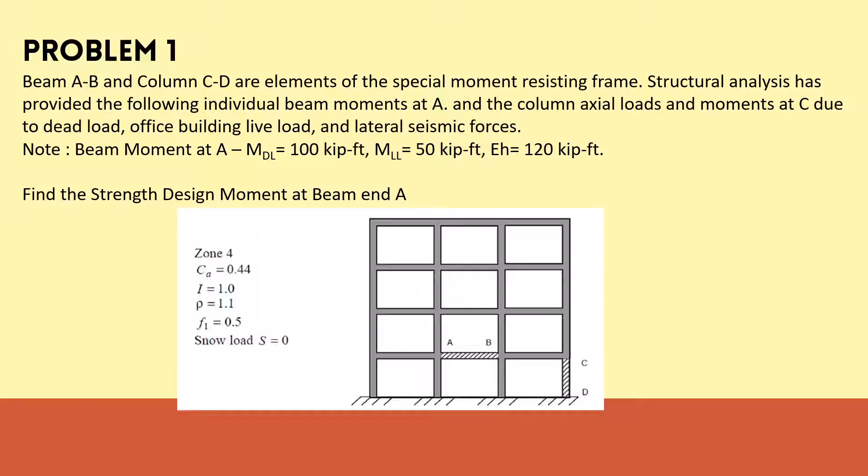For the solution in problem number 1, to identify the strength design moment at the beam end, we have the given formula where E is equivalent to the redundancy factor multiplied by the horizontal force plus the vertical force.

First, we identify the EV since the density and the seismic horizontal force are given. The formula for the vertical earthquake load is 0.5 Ca multiplied by the importance factor multiplied by the dead load. If we substitute the given parameters, we get an answer of 22 kip-feet.

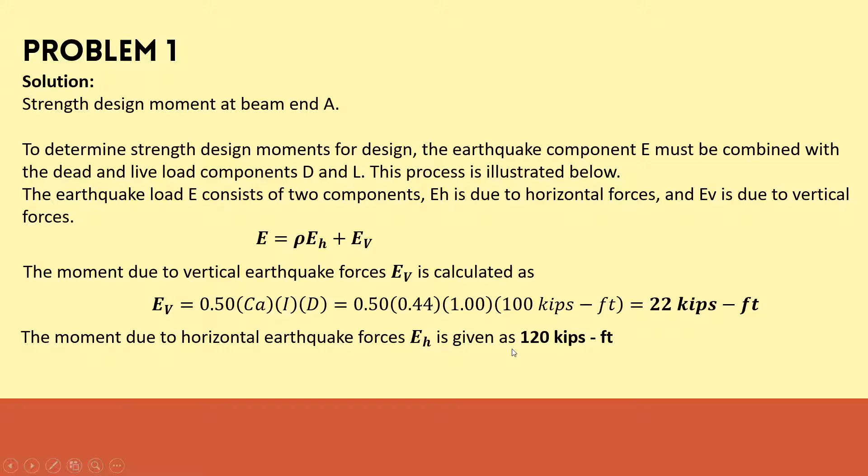As I mentioned earlier, the moment due to horizontal earthquake forces or EH is given as 120 kip-feet. So to substitute into the strength design moment at beam A, E equals density multiplied by the horizontal force plus the vertical force. Substituting, we get an answer of 154 kip-feet.

Since we're discussing moment, the relevant load combinations for earthquake are 1.2 dead load plus 1.0 earthquake load plus 1.0 F1 multiplied by the live load, and 0.9 dead load plus or minus 1.0 earthquake load. Since we're discussing moment, we consider these load combinations in terms of moment.

So for MA or beam moment at A, we have 1.2 moment dead load plus 1.0 moment earthquake load plus 1.0 F1 moment live load. If we substitute these values, we get an answer of 299 kip-feet.

For the second criteria, 0.9 moment dead load plus or minus 1.0 moment due to earthquake load. Since we have plus or minus here, we get two answers which are 244 or 64 kip-feet moments. Since we're looking for the strength design moment, it is safe and conservative enough to consider the lowest value, which is 64 kip-feet. So this is what we'll use for the design, or this becomes our design moment.

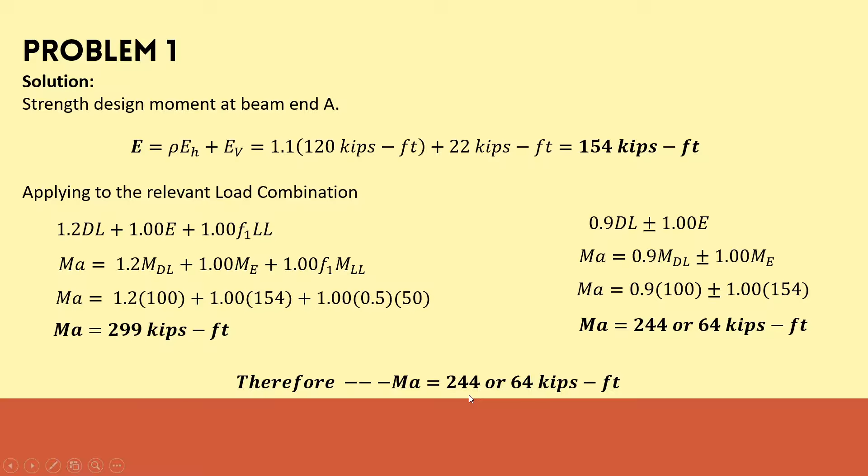Problem number 2: A 5-story concrete special moment resisting frame is shown below. We have the given framing with their theoretical displacement. We have an imaginary line here. This is supposed to be the behavior of our structure when we apply various forces per floor.

The specified lateral forces or Fx have been applied at the corresponding floor level, and the displacement dx at the floor center of mass have been found and are shown below. So for level 5, 4, 3, 2, 1, we have their corresponding heights. For example, this is 3.048, this is also given, and the highest is from level 1 at 3.658 based on the given data.

And their corresponding displacements are also tabulated. This is the displacement, delta S1. For example, at level 5, the displacement is 51.308. So from this point up to this point, the story displacement is said to be 51.308.

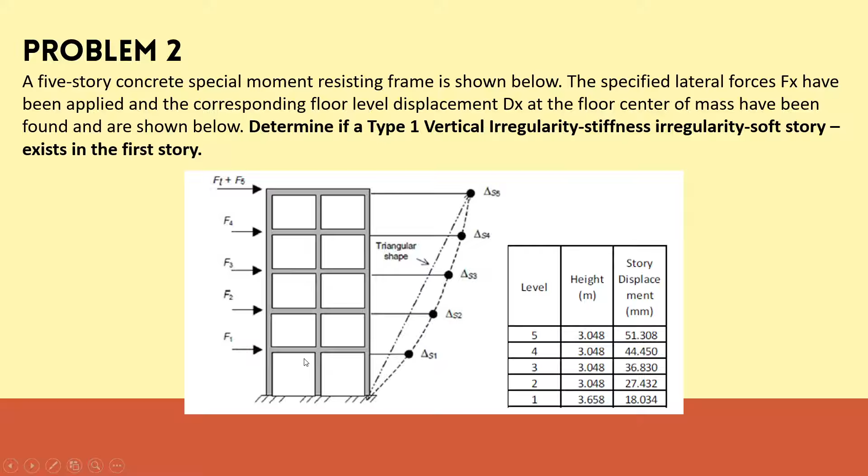According to the NSCP provisions, to determine if there is a Type 1 vertical irregularity, stiffness irregularity, or soft story, we need to perform two tests. First, the story stiffness is less than 70% of that of the story above, meaning our concerned story should be less than 70% of the story above. We'll compute this later. Second, the story stiffness is less than 80% of the average stiffness of the three stories.

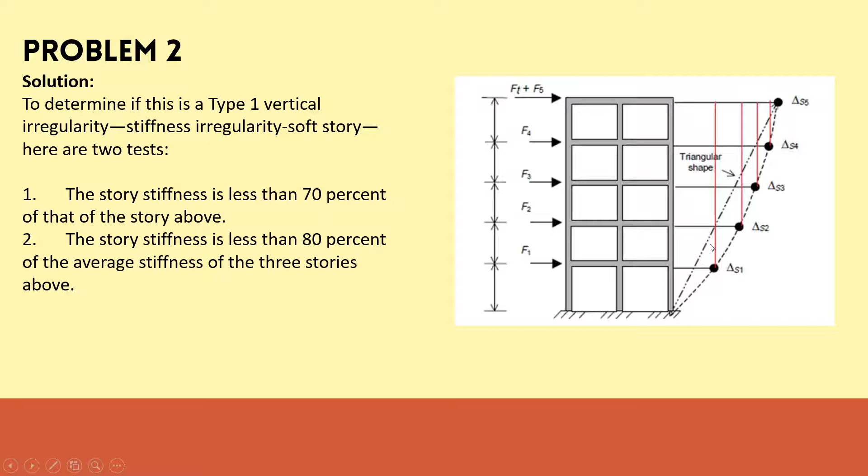Based sa figure natin, kapag maglalagay tayo ng imaginary line or another line dito, triangular yung shape ng ating diagram or yung ating displacement ng structure or story displacement.

So for the solution, in-attach ko dito yung ating table, yung given kanina, tsaka yung graph ng frame.

For level 1 story drift, from this point up to this point is 18.034. So ito yung displacement daw ng ating structure. Next, for the level 2 story drift, this one, we have 27.432 up to this point. Kaso ito yung concern natin.

So if this is 18.034 and this one is 27.432, yung kanilang difference is 9.398 millimeter.

And for story 3, we have, if this is 36.830, this point, up to this point na 27.432, we have 9.398. Then for level 4, this point up to this point, we have 7.62 millimeters. And for the level 5, this point up to this point, we have 6.858 millimeters.

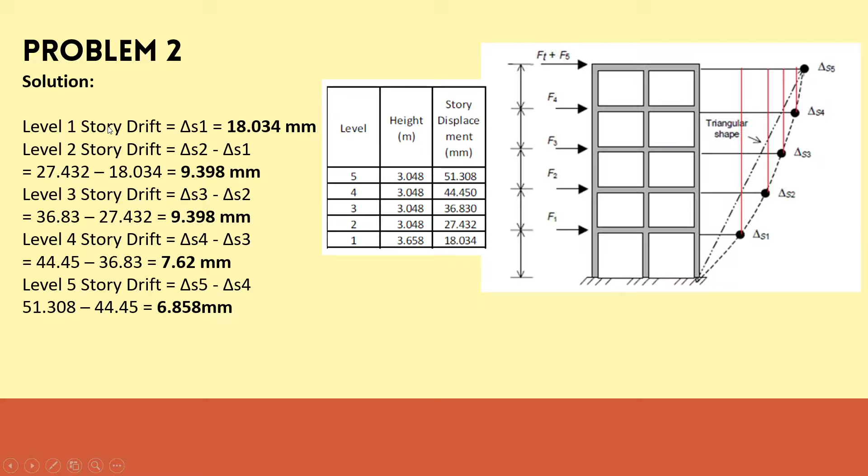As tabulated kanina, yung story drift ng ating level 1 is 18.034. Yung kanyang height to this is 3.658. Since naka-millimeter tayo, convert natin ito din ng thousands of millimeter para maging siyang ratio. Makakuha tayo ng 0.00493 for the level 1.

For level 2, we have 9.398 na level story drift divided by yung kanyang height na 3.048. So from this point up to this point, 3.048 daw yun. And makakakuha tayo ng...

0.00308 na ratio. And for story drift C or 3, we have 9.398 din na story drift sa kanyang level divided by yung kanyang height na 3.048, so 0.00308 din. Same procedure sa level 4 and level 5 na nakakuha tayo ng 0.00250 and 0.00225 na ratio respectively.

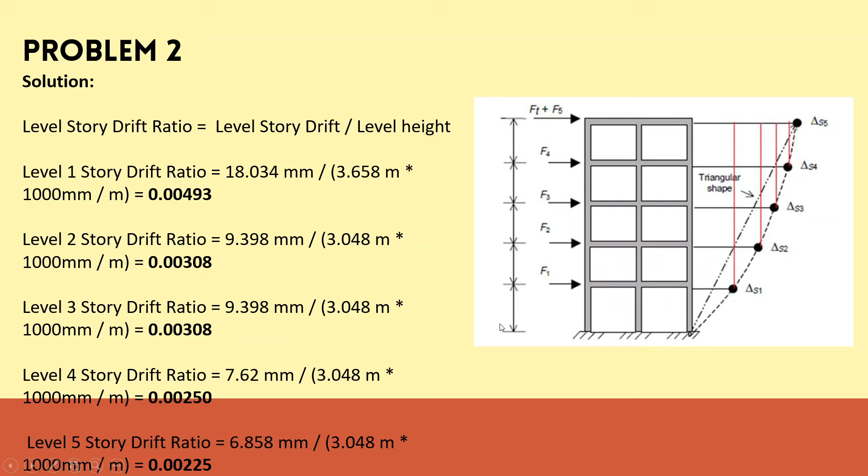Kung itatabulate natin yan, so for the level, sa height, sa story displacement, sa story drift, sa story drift ratio, and since kino-consider natin, kino-compare natin sa 70% of the story drift ratio, kailangan natin i-multiply ng 70% or maglagay ng another column to multiply the 70% of this ratio.

For the test 1, the story stiffness is less than 70% of that story above. So since ito yung level 1 natin, 0.00345, it is greater than 0.003083. Kaya meron tayong soft story sa level 1.

Dito naman sa level 2, since yung ratio natin is 0.002158 and mas malaki ito compare dito, so kaya wala tayong soft story.

Dito naman, ganun din, mas maliit yung 0.002158 compared to 0.0025, kaya wala din tayong soft story sa level 3. So 0.00175 then is way smaller or less than compared to the 0.00225. So wala tayong soft story doon.

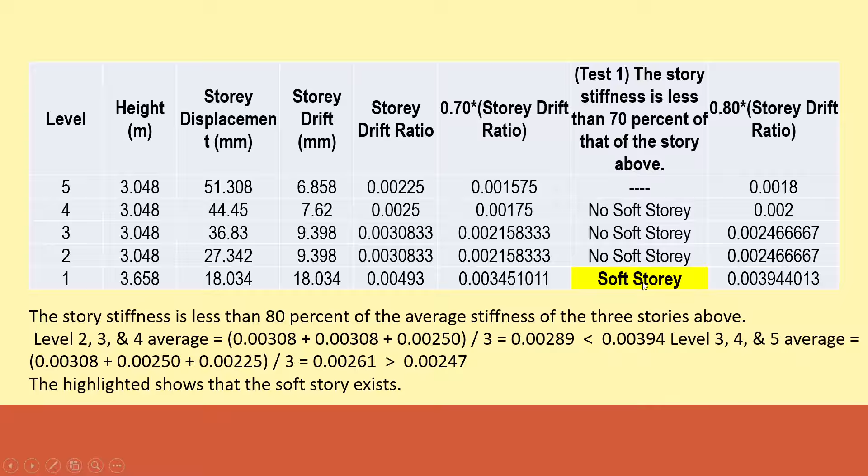So the story stiffness is less than 80% to the average stiffness of the 3-story above. Yung nag-govern or nag-satisfy sa condition na to is yung sa level 1 floor, kasi yung kanyang ratio ng average ng mga 3-story above is less than to the 80% of the corresponding story drift ratio. This one.

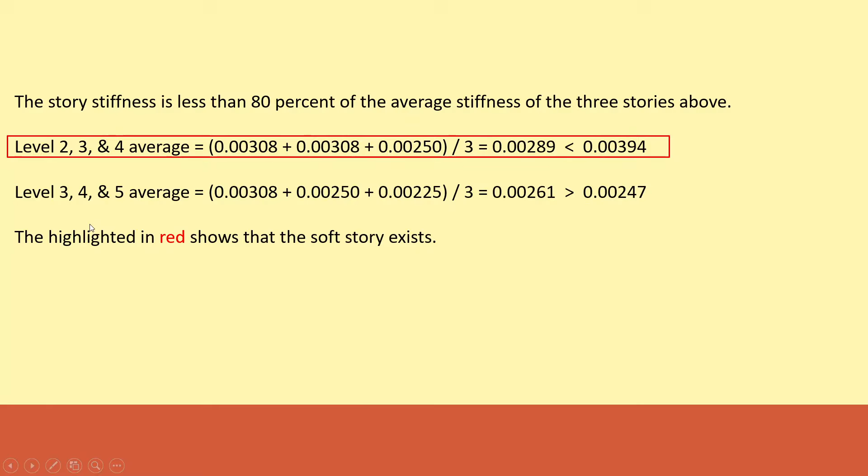So the highlighted in red shows that a soft story exists.

For problem number 3, a 5-story special moment frame office building has a heavily utility equipment installation at level 2. So meron tayong certain utility equipment dito, meron siyang timbang na per floor we have this given: weight 1, 100 kips, weight 2 is 170 kips, weight 3 is 110 kips, weight 4 is 110 kips, and weight 5 is 90 kips.

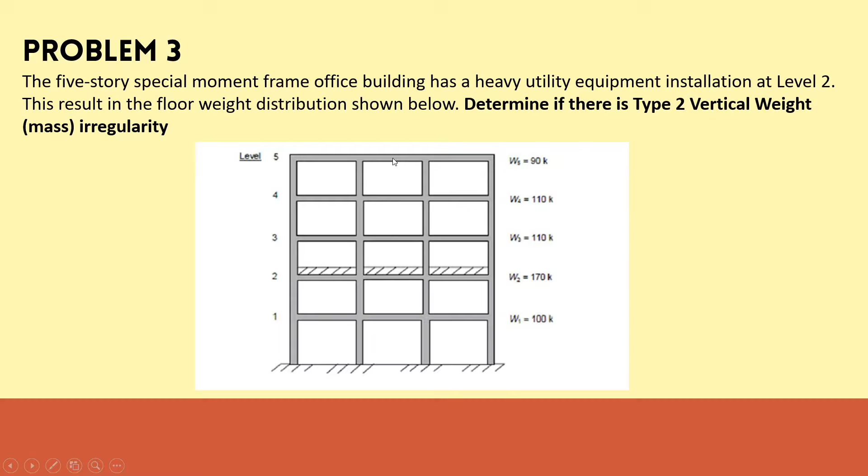Determine if there is a type 2 vertical weight or mass irregularity. According to NSCP 2015, a weight or mass vertical irregularity is considered to exist when the effective mass of an story is more than 150% of the adjacent story. So meron daw tayong vertical irregularities if yung ating story concern is more than 150% of the adjacent story. However, the requirement does not apply to the roof if the roof is lighter than the floor below.

So to check the effective mass at level 2, kailangan muna natin i-multiply yung mga adjacent floors niya sa taas at saka sa ibaba ng 150% or 1.5. So 1.5 multiplied by 100 kips, we have 150, and W2 or level 3 rather, 1.5 times 110 kips, we have 165 kips. Since 170 kips yung ating weight sa floor level 2, pipili tayo ng mas maliit compared sa adjacent story, kung ano yung pinakamaliit sa kanila - nagkataon yung pinakamaliit is 150, ito yung i-compare natin sa concerned floor.

Since weight 2 is greater than 150, therefore weight irregularity exists. So meron tayong irregularity sa weight dito, kasi mas malaki ng 170 kips compared to 150 lang sa level 1 or yung concern natin na adjacent floor. So again, there is a weight irregularity exists. Kailangan mas less than kasi itong weight natin na concern, compare sa kanyang adjacent floor.

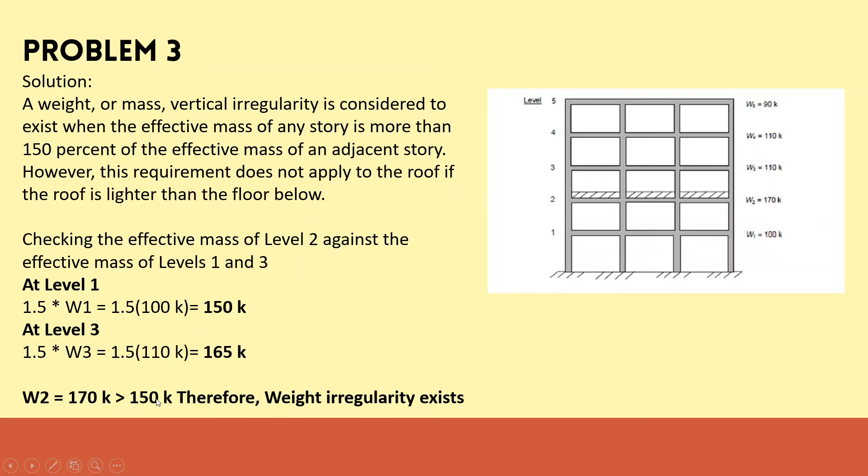Next, problem number 4: the lateral force resisting system of a 5-story special moment frame building shown below has a 25-foot setback at the third, fourth, and fifth story. So sa third, fourth, and fifth, kung tig 25 ito, hanggang 75 feet lang ito. Yung level 2 and 1 is tig 100 feet. Determine if a type 3 vertical irregularity or vertical geometric irregularity exists.

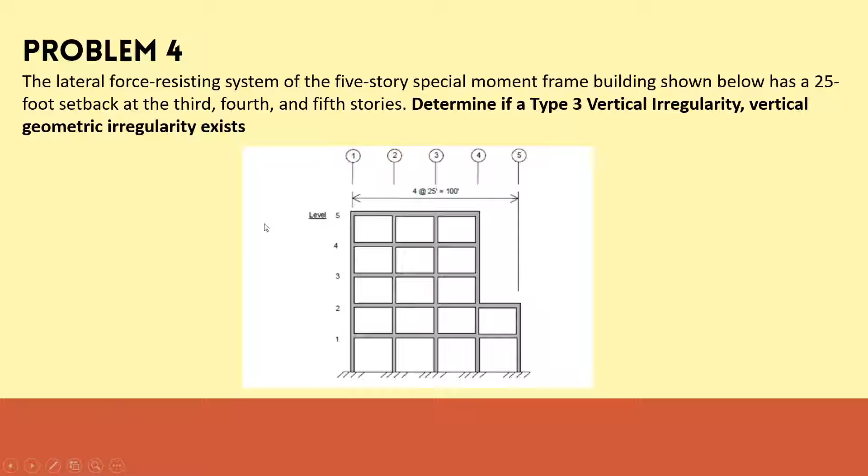According again to NSCP 2015, a vertical geometric irregularity is considered to exist where the horizontal dimension of the lateral force resisting system in any story is more than 130% of that of the adjacent story. One-story penthouses are not subjected to this requirement. In this example, the setback of level 3 must be checked.

So this one, kasi ito yung unang nagbago na dimension. In this example, the setback of level 3 must be checked. The ratios of the two levels: yung width level natin, this one is 100 feet, and ito naman is 75 feet. Since yung ratio ng level 2 and level 3 is 1.333, which is greater than 130%, kailangan kasi less than 130, therefore a vertical geometric irregularity is existent. That is for problem number 4.

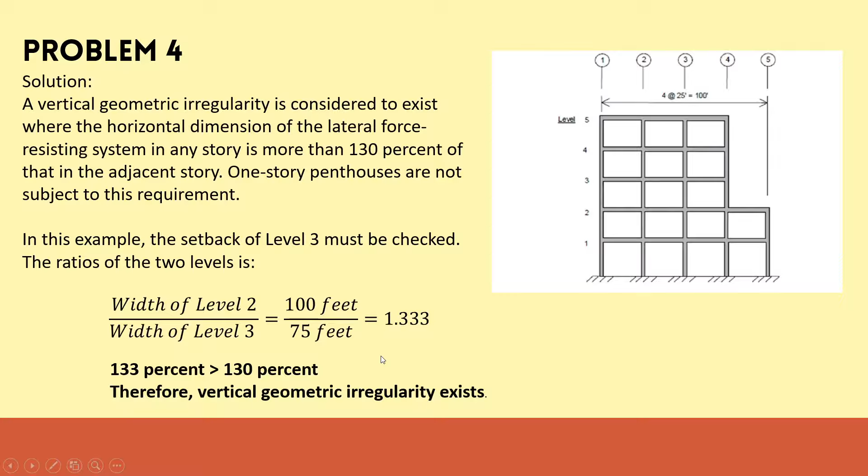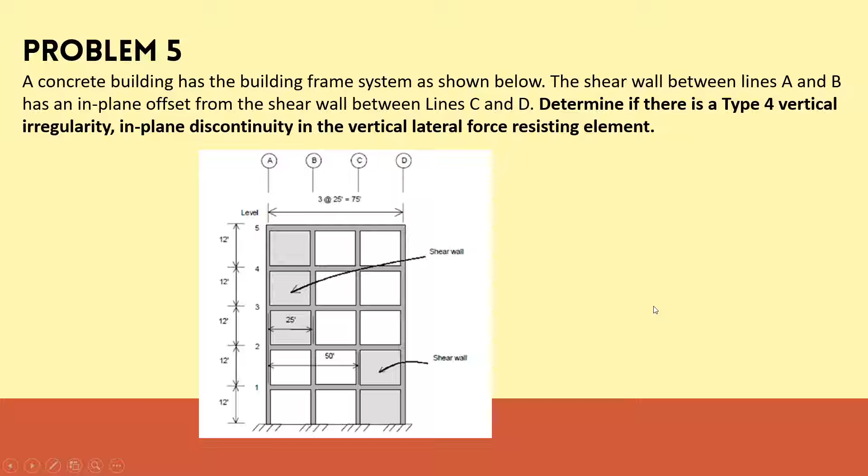Determine if there is a type 4 vertical irregularity, in-plane discontinuity in vertical lateral force resisting element. So check daw natin yung in-plane discontinuity. A type 4 vertical irregularity exists where there's an in-plane offset of the lateral force resisting elements greater than the length of the element. So kapag mas malaki yung distance na to or offset na to compare sa member elements natin, so existent yung ating type 4 vertical irregularity.

The left side of the upper shear wall, this one between A and B, is 50 feet. So from this point up to this point is 50 feet of the lower shear wall line CD. This 50-foot offset is greater than the 25-foot length of the offset. So mas yung distance ng element natin, or isang element natin, is 25 feet, which is less than compared to the offset dito sa may shear wall natin. So in short, there is in-plane discontinuity.

So as much as possible, kasi, in line or nasa isang plane lang dapat yung ating mga shear walls. So kapag mas malaki yung offset natin compared to the size of the element, so in short, or therefore, we have in-plane discontinuity.

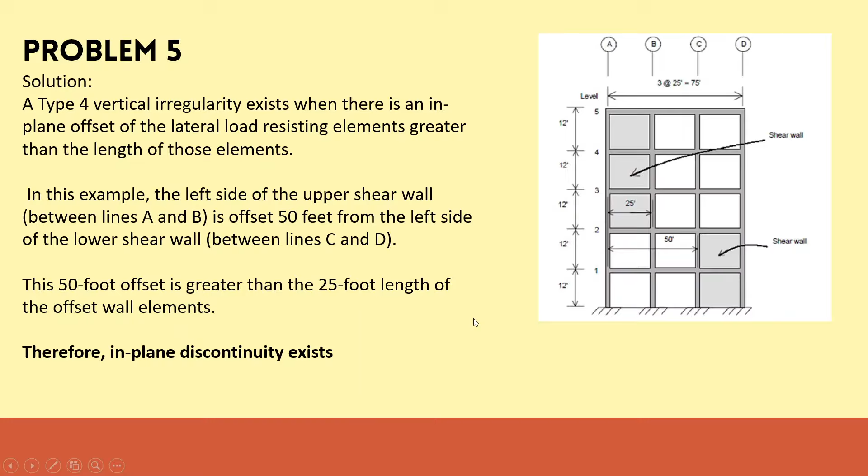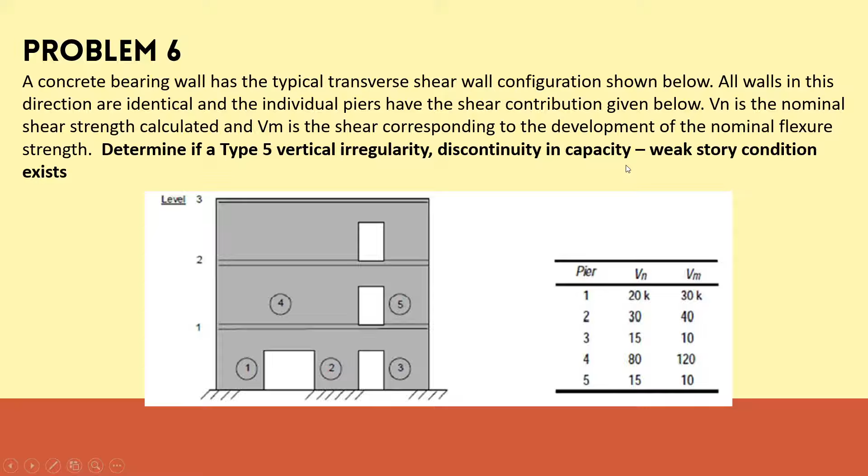So to check natin if meron tayong makikitang type 5 vertical irregularity - discontinuity in capacity, or weak story condition exists. According to NSCP, a type 5 weak story discontinuity in capacity exists when the story strength is less than 80% of that story above. The story strength is considered to be the total strength of seismic force resisting elements sharing the story shear in the direction under consideration.

So first, kailangan muna natin i-total yung mga shear natin dito, or yung Vn and Vm natin dito. Since meron tayong dalawang values per pier, pipiliin natin, for conservative reason, yung pinakamaliit na value among these.

So for the first story, since pier 1, 2, and 3 are on our first floor, we pick the smaller value. For pier 1, we have 20. For pier 2, we have 30 since it's smaller compared to 40, and pier 3 is 10. If we add these strengths, we have 60 kips. For the second story, pier 4 is 80, not 120 since this should be smaller, and 10 for VM. Adding these, we have 90 kips.

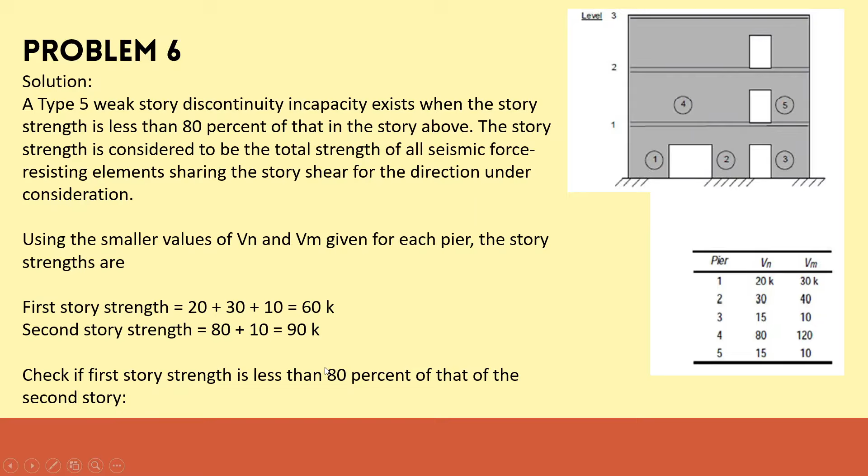Next, we check if the first story strength is less than 80% of the second story. So let's check if our first story strength, 60, is less than 80% of the second story. 60 kips is less than 0.80 times 90, which is 72. So this means there is a weak story condition that exists at our pier level 1.

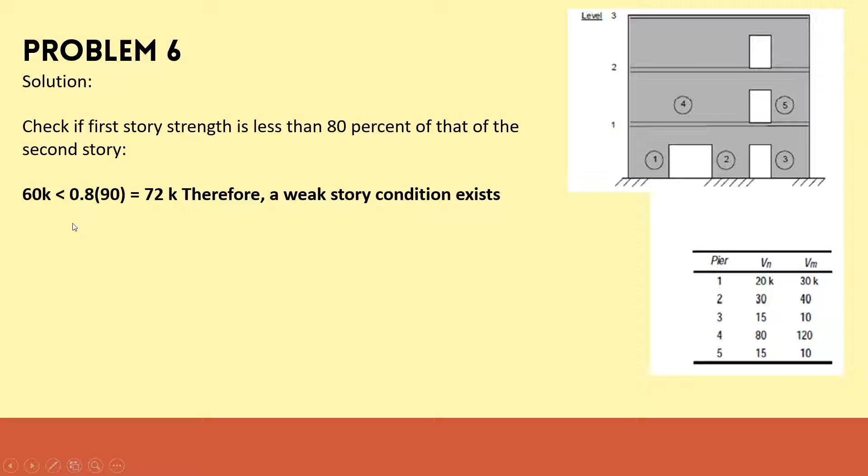For problem number 7, the plan configuration of a 10-story special moment frame is presented below. In every span, we have 25 feet, and in this direction, every span is 20 feet. So therefore, we have a 100 by 60 feet framing.

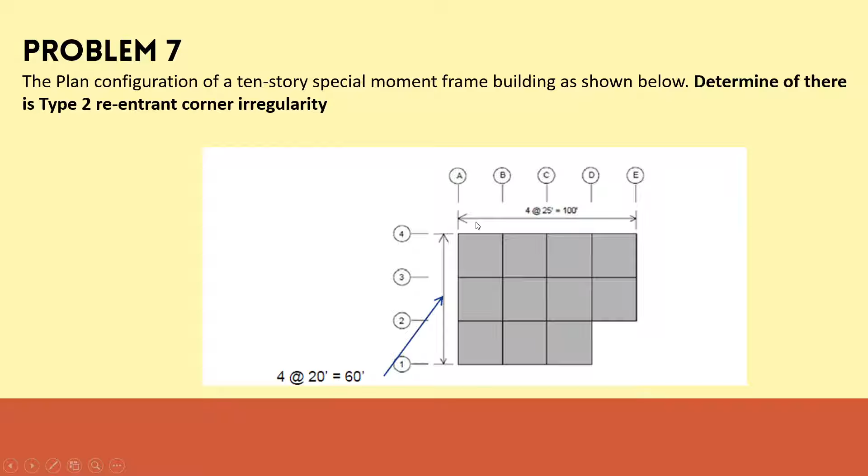Determine if there is a type 2 reentrant corner irregularity, or if this opening has an effect. A type 2 reentrant corner plan irregularity exists when the plan configuration of a structure and its lateral force resisting system contain a reentrant corner where both projections of the structure beyond the reentrant corner are greater than 15% of the plan dimension. So we check either side here. It needs to be greater than 15% of the projection beyond the reentrant corner. If greater than 15%, we have a type 2 reentrant corner plan irregularity.

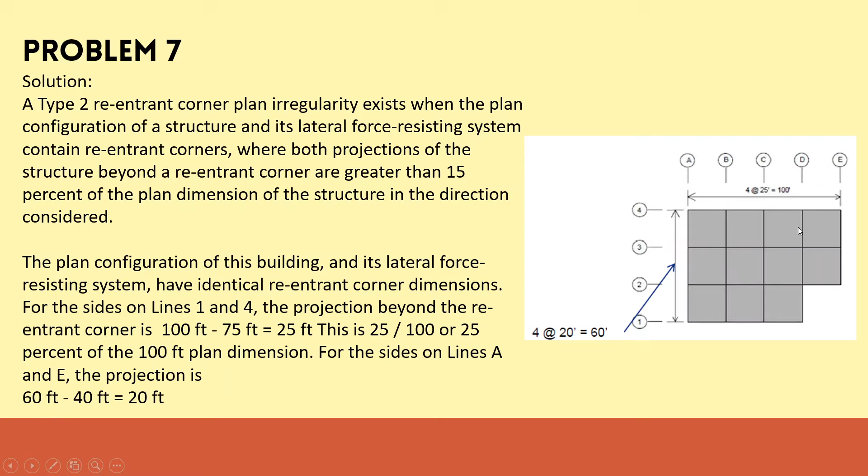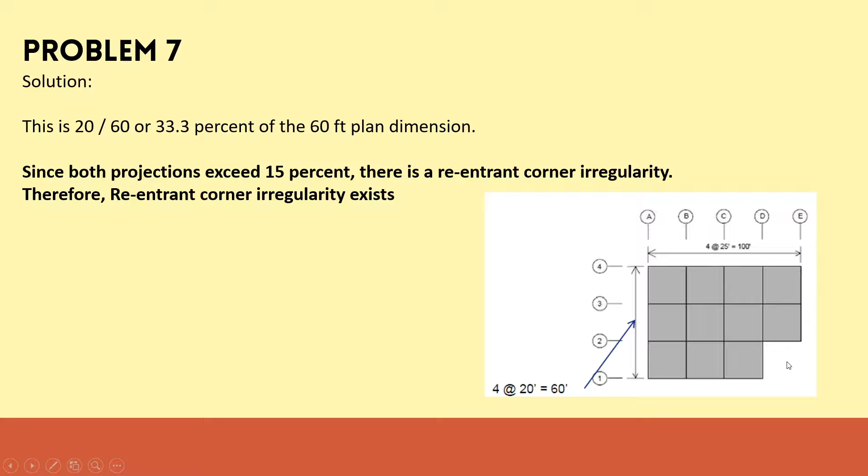For this side, we have 100 minus 75, giving us 25, divided by the total length of 100, which is 25%. For side AE, we have a total of 60 minus 40, giving us 20 feet. Dividing this by the total length of 60 gives 33.33%. Since both projections exceed 15%, there's a reentrant corner irregularity. So this opening has an effect based on our computation.

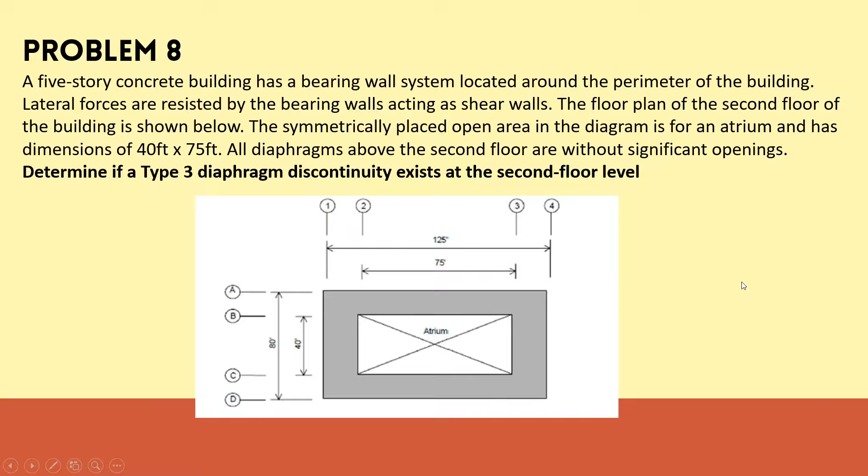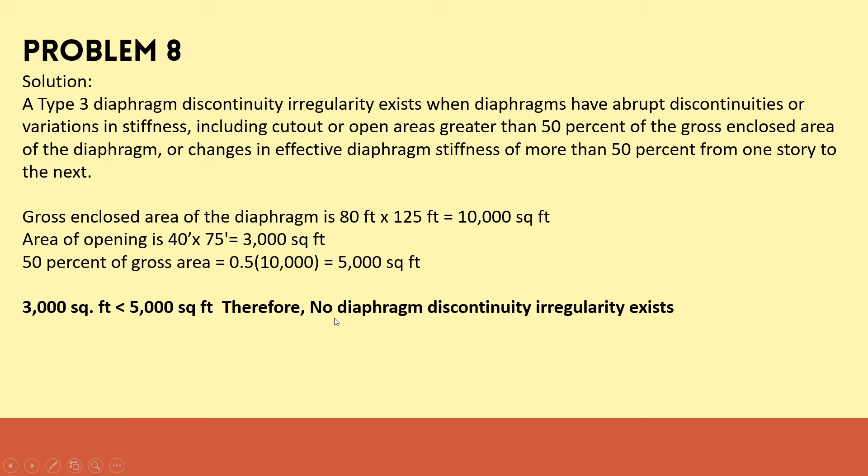For a type 3 diaphragm discontinuity irregularity to exist, there must be abrupt discontinuities including cutouts if greater than 50% of our opening compared to the gross area. Our gross area is 80 feet by 125, or 10,000 square feet. Our opening is 40 by 75, which is 3,000 square feet. 50% of our gross area of 10,000 is 5,000 square feet. Since our opening is small compared to 50% of the gross area, therefore there is no diaphragm discontinuity irregularity.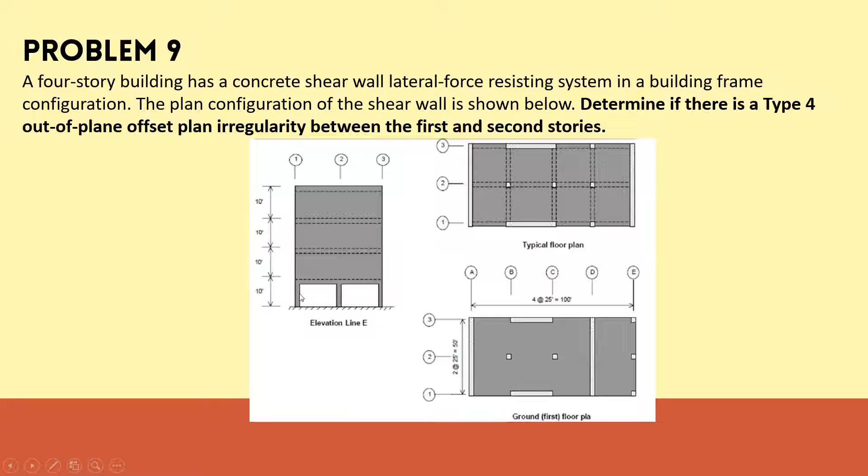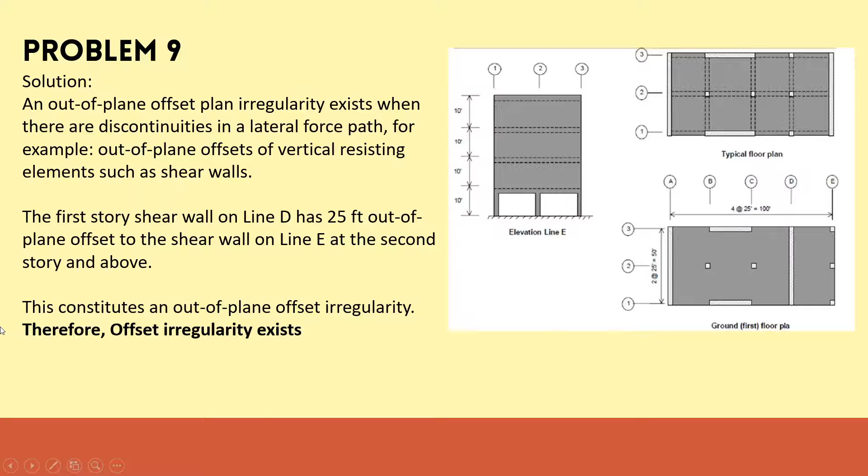An out-of-plane offset plan irregularity exists when there are discontinuities in a lateral force path, for example, out-of-plane offsets of vertical resisting elements such as shear walls. The first-story shear wall on line D is 25 feet out of plane offset to the shear wall on line E. There's a shear wall here, and the second story above. This constitutes an out-of-plane offset irregularity. Therefore, offset irregularity exists for problem number 9.

Problem number 10, a 10-story building has the floor plan as shown below for all levels. Special moment resisting frames are located at the perimeter of the building on lines 1, 4, A, and F. This one is F. We determine if there is a type 5 non-parallel irregularity.

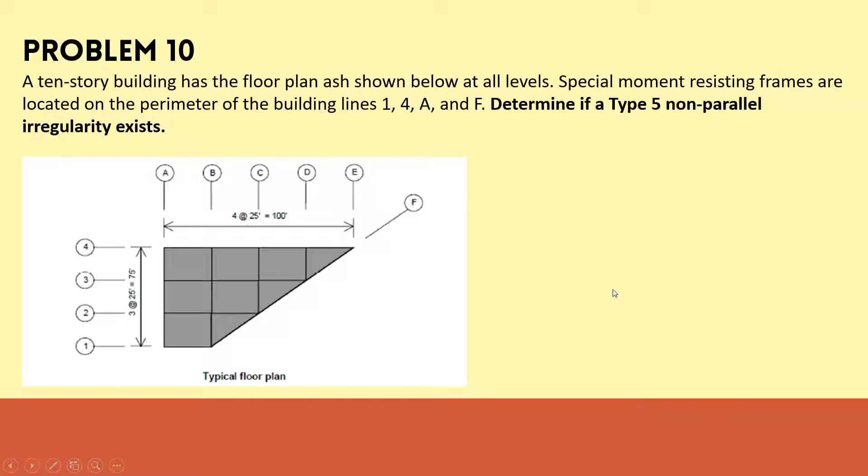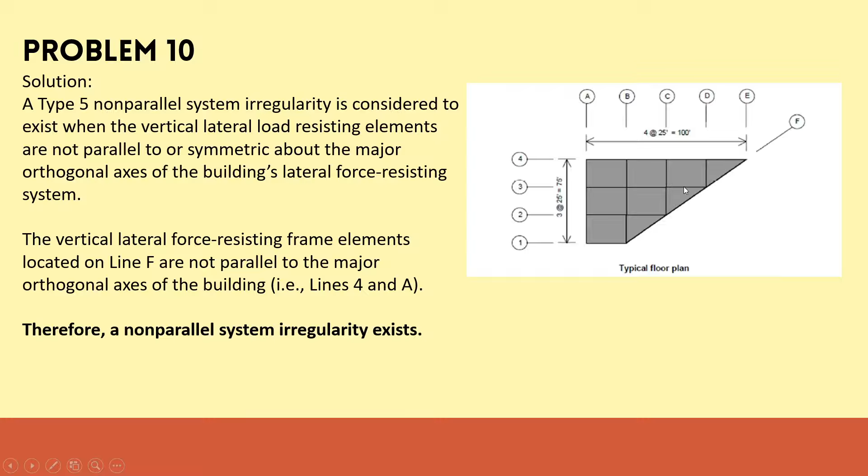According to the NSCP, a type 5 non-parallel system irregularity is considered to exist when the vertical lateral load resisting elements are not parallel to or symmetric about the major orthogonal axis. So when there is something not parallel or symmetric about our major orthogonal dimension. The vertical lateral force resisting frame elements located on line F are not parallel to the major orthogonal axis here. It is not parallel. Therefore, a non-parallel system irregularity exists.